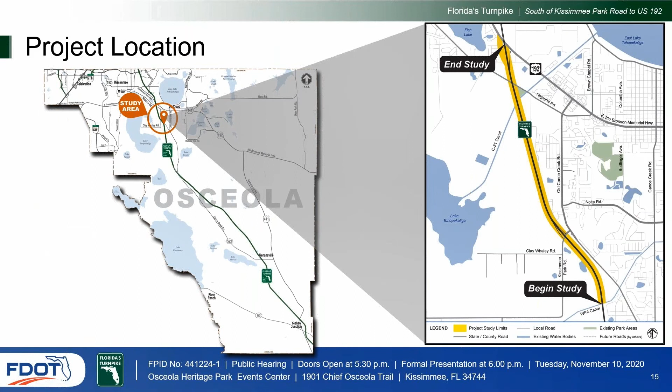The limits of this PD&E study are from south of Kissimmee Park Road to US 192 in Osceola County. The project is approximately 4 miles long and is focused on 3 areas: the Turnpike Main Line, the Kissimmee Park Road partial interchange, and the US 192 partial interchange.

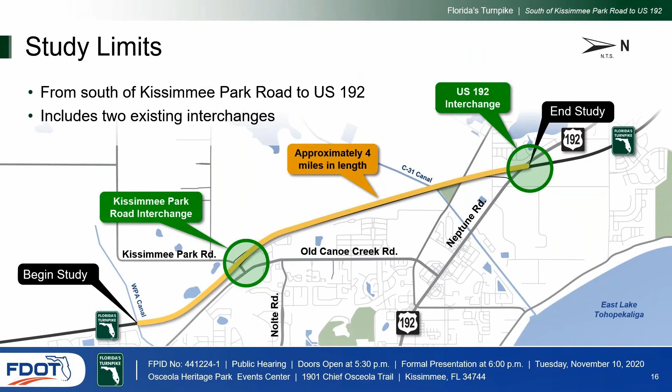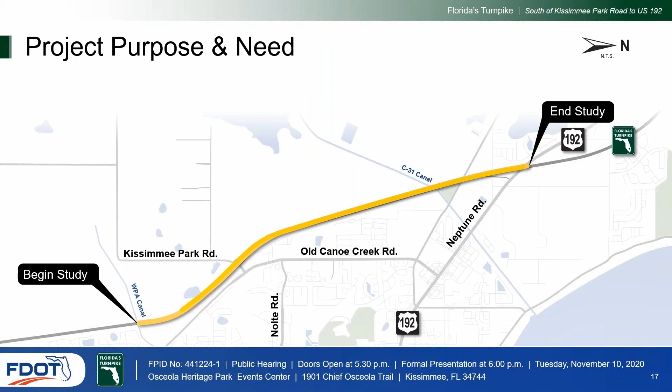The purpose and need for a project provides the basis for developing, considering, evaluating, and eliminating project alternatives. The project purpose and need are to enhance safety, address forecasted year 2045 traffic needs, improve accessibility and mobility, and enhance emergency evacuation, while avoiding and minimizing environmental impacts.

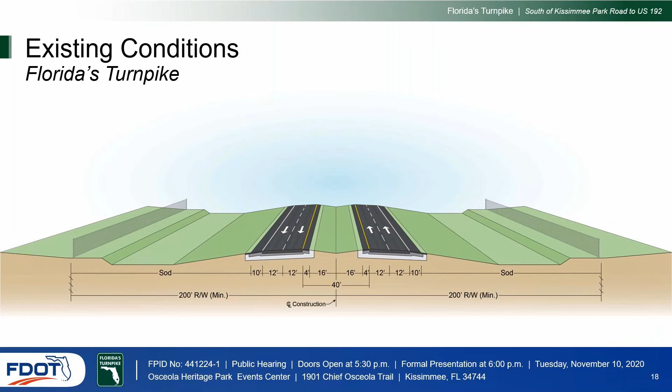The Turnpike is currently a 4-lane divided roadway with 2 travel lanes in the northbound and southbound direction. The US 192 interchange is currently a partial interchange with only a northbound off-ramp. The existing Kissimmee Park Road interchange is a partial interchange that only provides northbound on and southbound off movements. There is no access to and from the south.

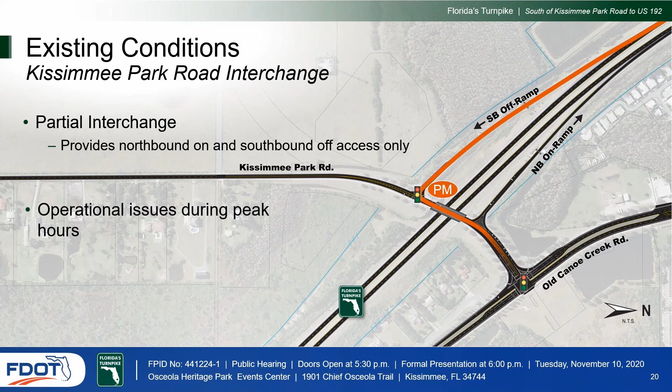Operational issues occur during both the AM and PM peak hours when traveling through the study area. The intersections along Kissimmee Park Road from the Turnpike ramps to Old Canoe Creek Road are closely spaced, contributing to the ongoing operational issues and a high incidence of rear-end crashes. The steep vertical grade of the Kissimmee Park Road interchange and lack of capacity on Old Canoe Creek Road also contributes to the problems with operational and safety issues.

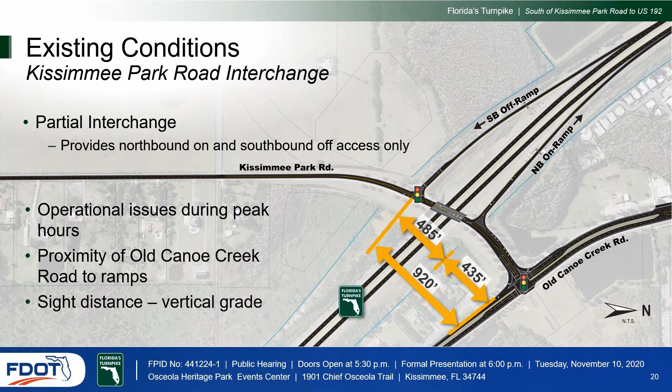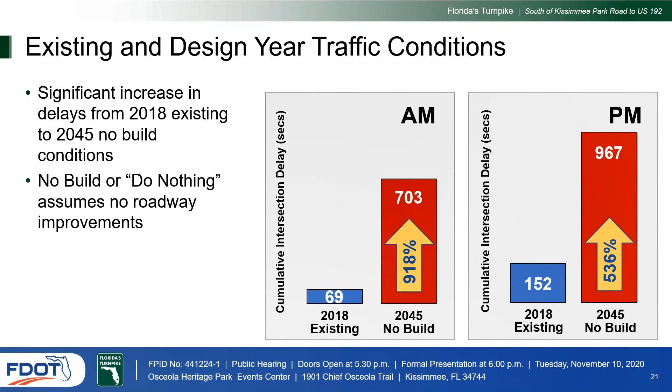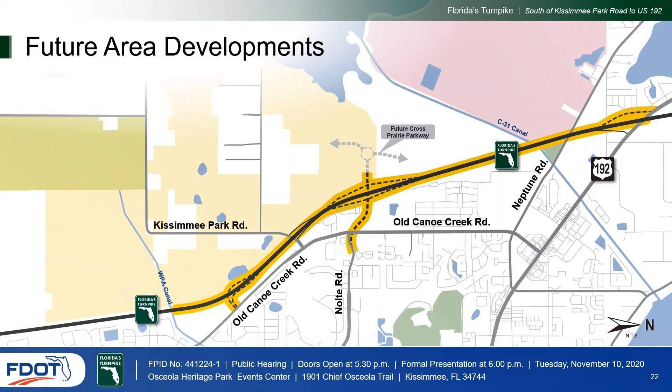Forecasts show a significant increase in delay at the study area intersections between 2018 to 2045 under no-build conditions, meaning if nothing is done to mitigate existing congestion. Projections indicate that the population of Osceola County is expected to grow 74% and employment 180% between 2015 and 2040. A portion of this growth is due to several planned developments in the vicinity of the study area, including Bellatara, the Edgewater Development of Regional Impact, and the Tohoqua subdivision.

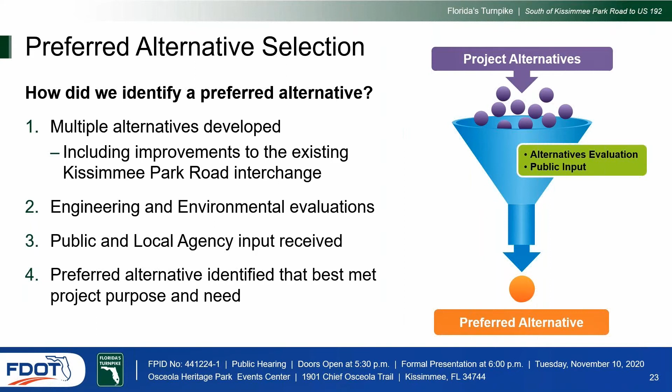In order to identify a preferred alternative, we first developed and evaluated multiple project alternatives, including some that improve the existing Kissimmee Park Road interchange. Engineering and environmental evaluations were performed, and local agency and public input were solicited. The preferred project alternative is the one that best meets the project purpose and need.

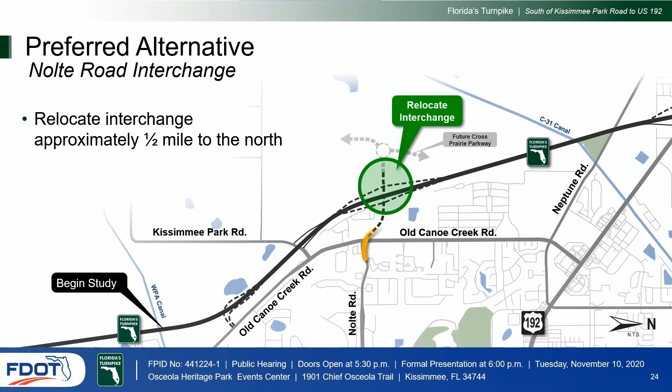The preferred alternative of this PD&E study relocates the existing Kissimmee Park Road interchange approximately a half-mile north to connect with an extension of Nolte Road. The ramps at the existing Kissimmee Park Road interchange will be removed, but the overpass will remain in place.

Relocating the interchange movements from Kissimmee Park Road to Nolte Road will allow for a full interchange with the Turnpike, accommodating all movements to and from the north and south. It will also provide a direct connection to Nolte Road, a major east-west corridor in Osceola County.

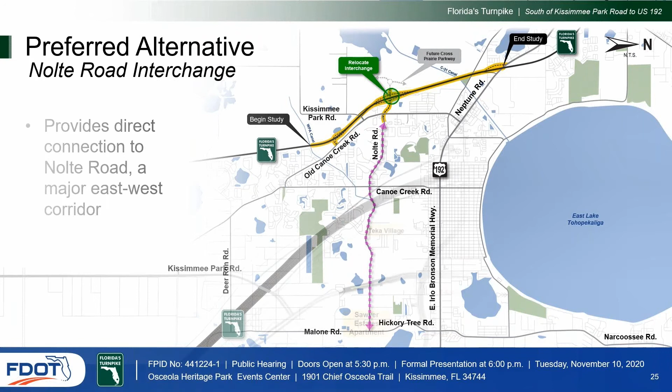The advantages of relocating the existing Kissimmee Park Road interchange to Nolte Road include increasing the distance between Old Canoe Creek Road and the Turnpike ramps, providing additional space for turn lanes and signal queues, and reducing turning movements at the Kissimmee Park Road intersection with Old Canoe Creek Road.

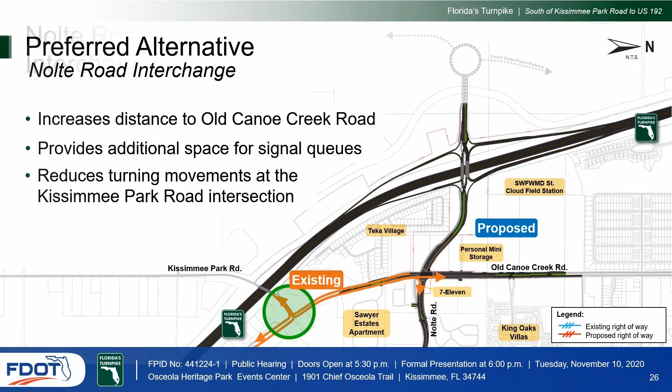The proposed interchange configuration for the Nolte Road interchange is a diverging diamond interchange, or DDI, a relatively new configuration in the state of Florida. These types of interchanges have recently increased in popularity as they have shown an increase in operations with a reduced footprint as compared to other types of interchanges. They also enhance safety and reduce risk of collisions associated with movements through the interchange.

The DDI has already been implemented in other parts of the state, including Sarasota and Viera. Many others are currently under design as well.

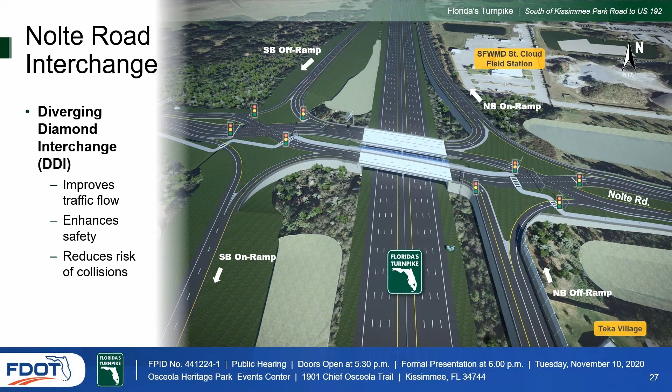The DDI interchange shown here allows eastbound and westbound traffic to temporarily cross to the left side of the road. The intent of shifting these movements is to increase traffic flow through an interchange without increasing the number of traffic signals. In the case of traffic on Nolte Road entering the DDI from the west, traffic would enter the signalized intersection and cross over to the left to drive on the left side of the bridge. This traffic then proceeds to the next signalized intersection, where traffic crosses back to the right side of the road and resumes a normal travel pattern. Both the left turn movement to proceed northbound on the Turnpike and the right turn movement to proceed southbound on the Turnpike are free flow movements, not having to worry about opposing traffic.

Similarly, traffic entering the DDI from the east crosses over to the left to drive on the left side of the bridge. This traffic then proceeds to the next signalized intersection, where traffic crosses back to the right side of the road and resumes a normal travel pattern. Once again, the left turn movement to proceed southbound on the Turnpike and the right turn movement to proceed northbound on the Turnpike are free flow movements, not having to worry about opposing traffic. At the next signalized intersection, traffic crosses back to the right side of the road and resumes a normal travel pattern.

Traffic entering the DDI from the north stays in the left turn lane to make the left turn movement and the right turn lane to make the right turn movement. This is the same for traffic entering the DDI from the south, staying in the left turn lane to make the left turn movement and right turn lane to make the right turn movement. In both instances, for traffic entering the DDI from the north or the south, there is no need to cross opposing traffic to make these left turn and right turn movements.

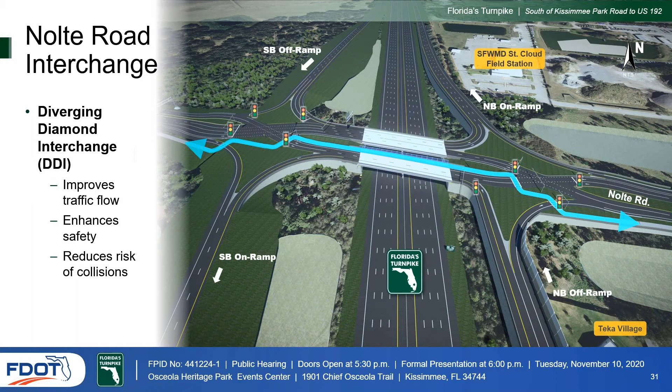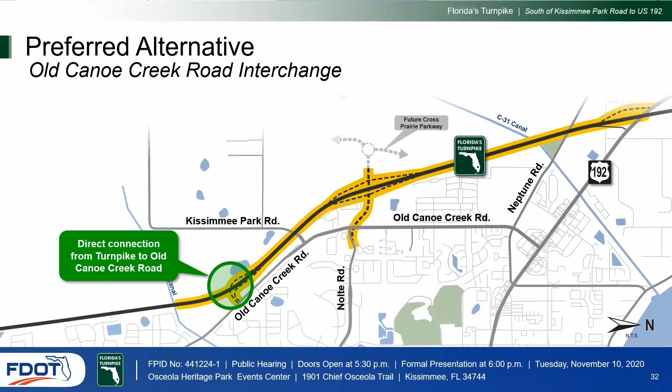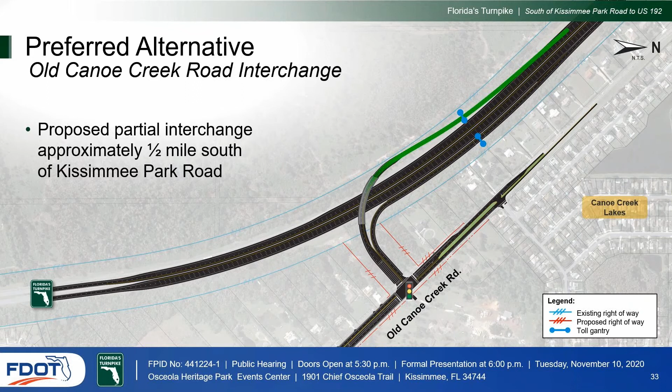Future traffic projections also show the need for an additional connection to the Turnpike, south of Kissimmee Park Road. This additional Turnpike connection will be located approximately half a mile south of Kissimmee Park Road and will be configured as a partial interchange between the Turnpike and Old Canoe Creek Road. This interchange will include a southbound off-ramp and a northbound on-ramp only.

At the US 192 interchange, a southbound on-ramp will be added as close to the Turnpike main line as possible and within existing FDOT right-of-way. A northbound on-ramp and southbound off-ramp will be constructed under a separate project, which is currently in design. The additional ramps will convert the partial interchange into a full interchange, completing the interchange movements at the US 192 interchange.

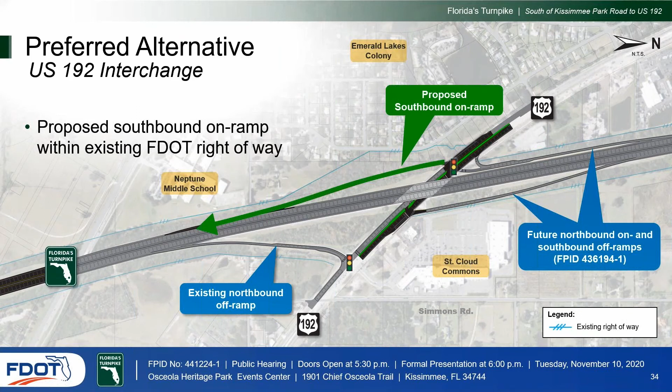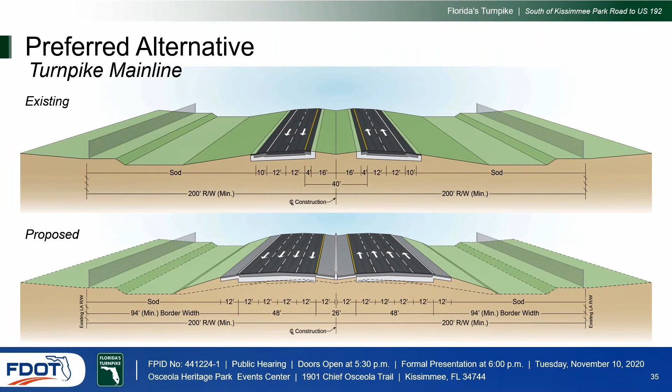The Turnpike main line will be widened from the existing 4 travel lanes to 8 travel lanes, 4 in each direction. The widening will occur both to the inside and outside of the existing lanes.

Access modifications will occur with the preferred alternative. This will include removing the existing on and off ramps at the existing Kissimmee Park Road interchange. The overpass will remain in place.

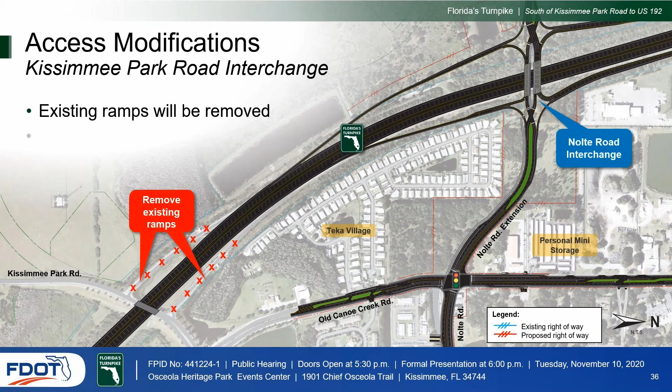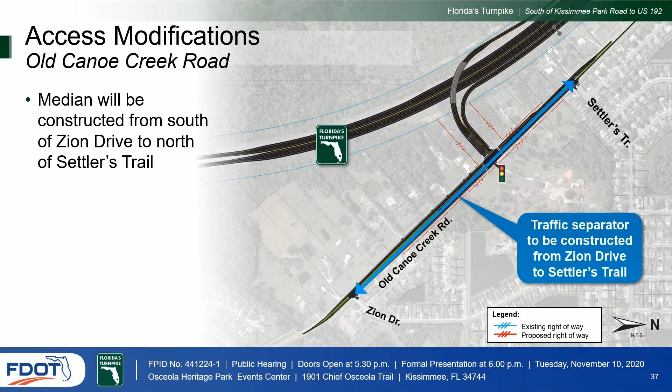Access modifications will occur along Old Canoe Creek Road in the area of the new partial interchange. This includes constructing a median from south of Zion Drive to north of Settlers Trail. Both Zion Drive and Settlers Trail will be full median openings and will allow for U-turns.

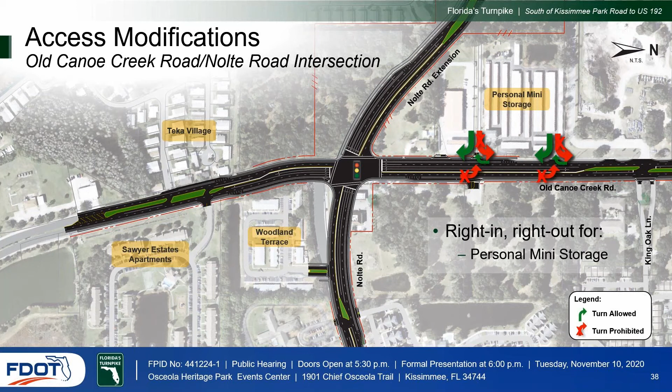There will also be access modifications along Old Canoe Creek Road, just north of the Nolte Road intersection. The personal mini storage driveways will be restricted to right in and right out access. Northbound left turns into the driveways will be restricted. U-turns would be made at the Nolte Road and King Oak Lane intersections.

Access modifications will occur along Nolte Road. The Woodland Terrace driveway will be restricted to right in and right out access. Westbound left turns into Woodland Terrace will be restricted. The existing full median opening at the Solaris Healthcare Osceola and Summit Crestwood apartment driveways will be converted to a directional median opening. Left turns into Solaris Healthcare will be allowed, but left turns into Summit Crestwood apartments will be restricted. Left turns out of both driveways will be restricted. U-turns would be made at the Nolte Road and Pine Chase Circle intersections.

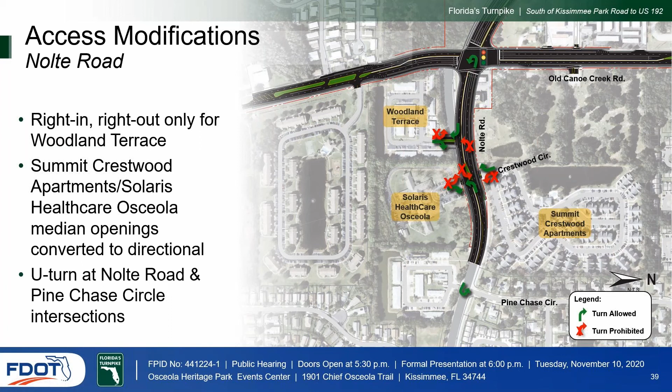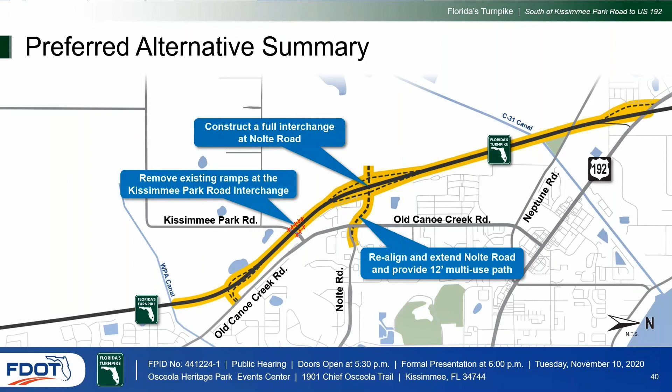In summary, the preferred alternative includes the following: realignment and extension of Nolte Road west to a new interchange with the Turnpike, removing the ramps at the existing Kissimmee Park Road interchange, widening the Turnpike main line from 4 to 8 travel lanes, constructing a southbound on-ramp at the existing US 192 partial interchange, constructing a partial interchange between the Turnpike and Old Canoe Creek Road, and access modifications along Old Canoe Creek Road and Nolte Road.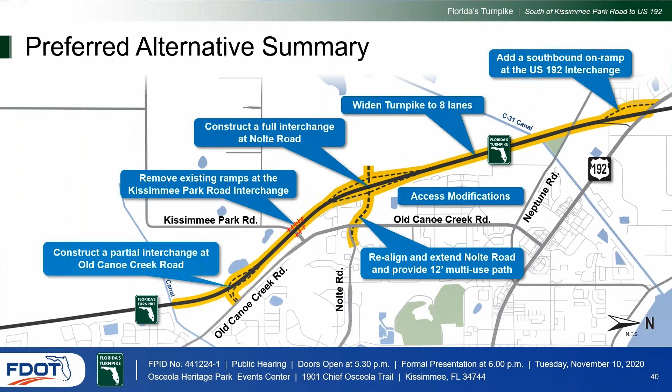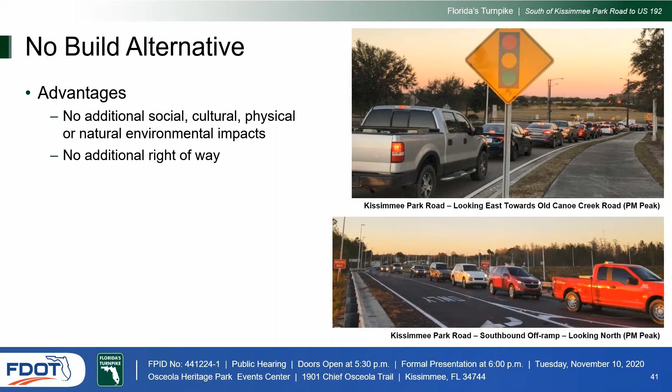The no-build alternative will also be considered. This alternative examines what happens if the Turnpike widening and Nolte Road interchange project is not built. Advantages include: there are no impacts to the social, physical, or natural environment, and no additional right-of-way required. Disadvantages include increased congestion, slower emergency evacuation and response times, no access to and from the south at the Kissimmee Park Road interchange, and future growth in this area would not be accommodated.

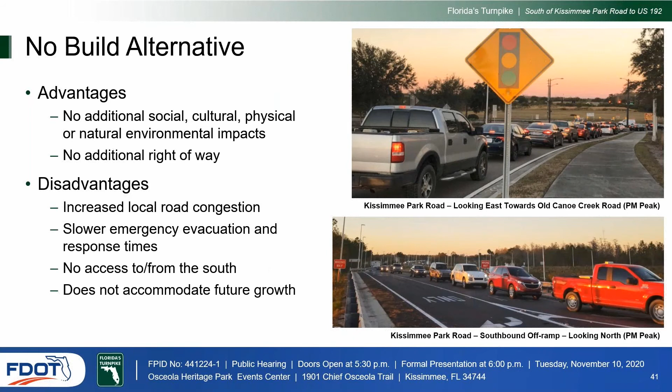Analysis shows an overall reduction in study area travel time and delay with the build alternative versus the no-build alternative. This will result in reduced congestion, reduced potential for crashes, and lower emissions with the build alternative.

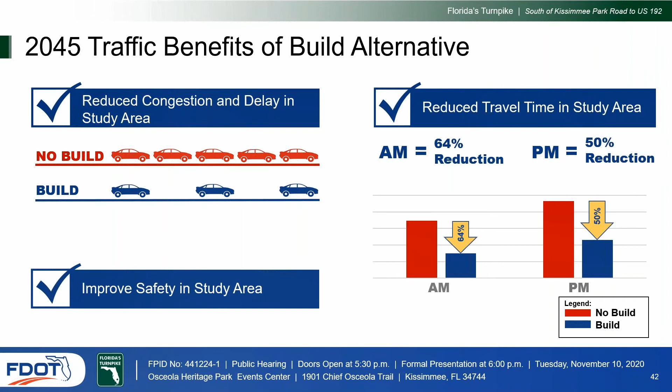One of the unavoidable consequences on a project such as this is the necessary right-of-way acquisition and relocations. On this project, we anticipate the relocation of 3 commercial sites and 14 potential residential parcel relocations. All right-of-way acquisition will be conducted in accordance with Florida Statute 339.09 and the Federal Uniform Relocation Assistance and Real Property Acquisition Policies Act of 1970, commonly known as the Uniform Act.

If you are required to make any type of move as a result of a Department of Transportation project, you can expect to be treated in a fair and helpful manner and in compliance with the Uniform Relocation Assistance Act. If a move is required, you will be contacted by an appraiser who will inspect your property. We encourage you to be present during the inspection and provide information about the value of your property. You may also be eligible for relocation advisory services and payment benefits.

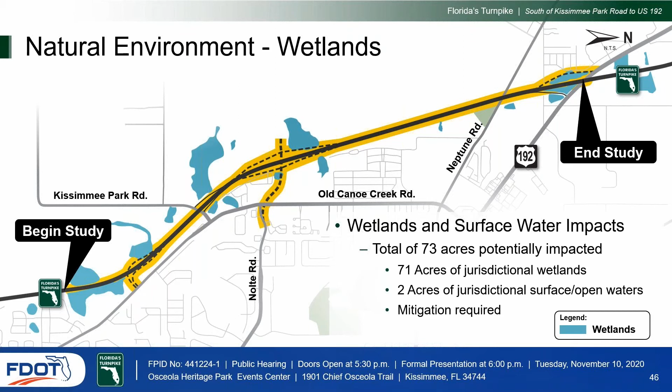Federal and/or state-listed species may be present or utilize areas within the proposed project, but no impacts are anticipated. Florida's Turnpike Enterprise will continue coordinating with the United States Fish and Wildlife Service and the Florida Fish and Wildlife Conservation Commission regarding these species.

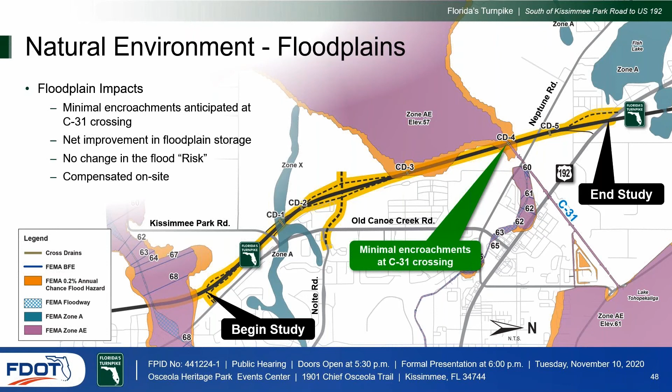Minimal encroachments into designated floodplains are anticipated. A net improvement in floodplain storage will be realized with the removal of the Kissimmee Park Road interchange ramps. Therefore, there is no significant change in flood risk as a result of the proposed widening, and minimal impacts are expected to the 100-year floodplain.

Results of the contamination screening showed that 4 sites ranked medium risk could be potentially impacted by the preferred alternative. These sites will be further evaluated during the design phase to identify options to avoid, minimize, or mitigate contamination involvement.

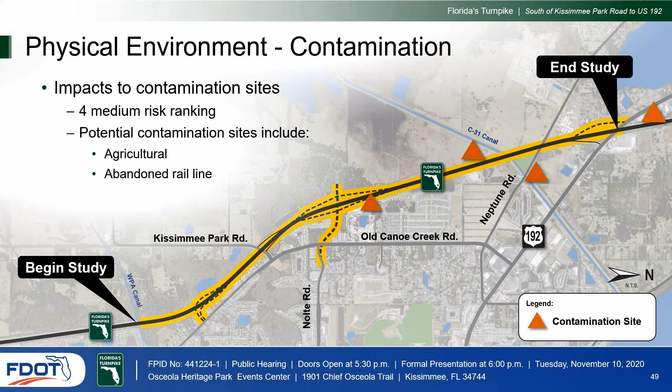A noise study was conducted in accordance with state and federal regulations to evaluate traffic noise levels for the proposed improvements. Residences in Tika Village, residences along Betsy Ross Lane, the Neptune Elementary School playground, and the Neptune Middle School sports field are impacted locations where noise walls were determined to be potentially feasible and reasonable. These locations will be reevaluated for potential noise barriers during the design phase. We encourage you to call the Turnpike project manager if you have any questions regarding potential noise wall locations.

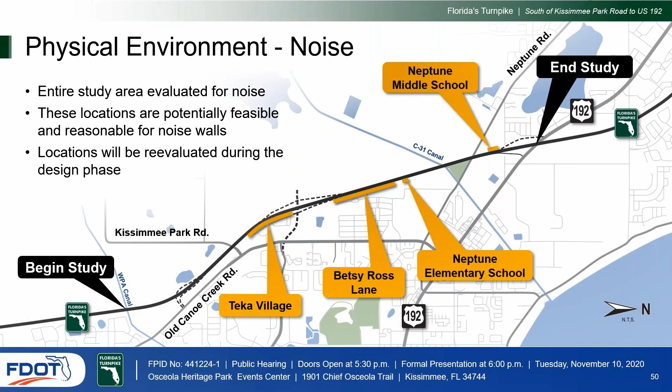The total project cost for the preferred alternative is $193 million in 2020 present-day cost. Included in this estimated cost are design, right-of-way, construction, and other services.

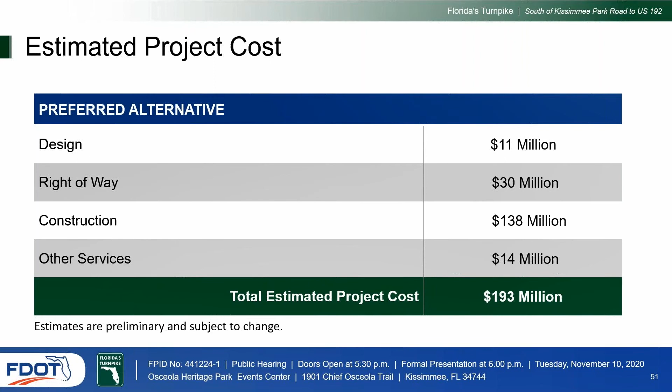We continue to encourage public input to help us make this important decision. You can submit written comments at the project website, turnpikestcloud.com. If at the in-person location, you can complete a printed comment form. You can email the project manager directly.

For the benefit of our listen-only participants, the project manager's contact information is Jazlyn Heywood, JAZLYNHEYWOOD at Florida's Turnpike Enterprise, P.O. Box 613069, Ocoee, Florida 34761. Her telephone number, 407-264-3298. While written comments and questions are accepted at any time, they must be received no later than November 30, 2020 to become part of the public hearing record.

The next step is to incorporate your input on this public hearing into our decision-making process. The comment period will close on November 30th, and your input will be considered. The final PD&E document will then be provided to the District Secretary of Florida's Turnpike Enterprise for approval. The PD&E study was initiated in the summer of 2018 and is expected to be complete in February of 2021. Future project phases of the preferred alternative include design, right-of-way, construction, and maintenance. This project has and will continue to comply with all applicable state and federal rules and regulations.